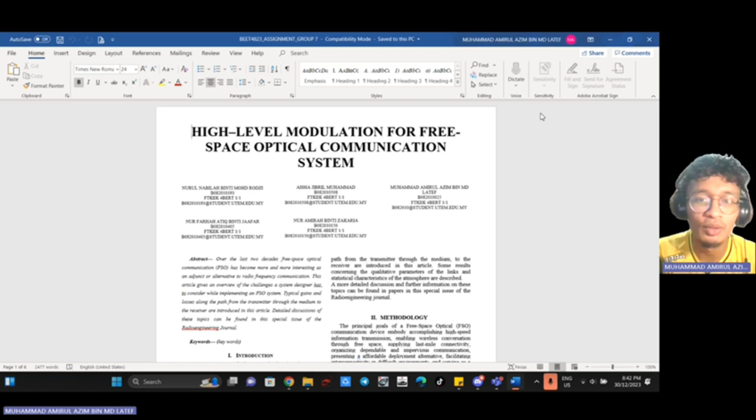Abstract. Over the last 2 decades, free space optical communication, FSO, has become more and more interesting as an adjunct or alternative to radio frequency communication. This article gives an overview of the challenges a system designer has to consider while implementing an FSO system. Detailed discussion of this topic can be found in the special issue of the Radioengineering Journal.

For the introduction, free space optical communication FSO systems in space and inside the atmosphere have developed in response to a growing need for high speed and tap-proof communication systems. Links involving satellites, deep space probes, ground stations, unmanned aerial vehicles UAV, high altitude platforms HAP, aircraft and other nomadic communication partners are of practical interest. Moreover, all links can be used in both military and civilian contexts.

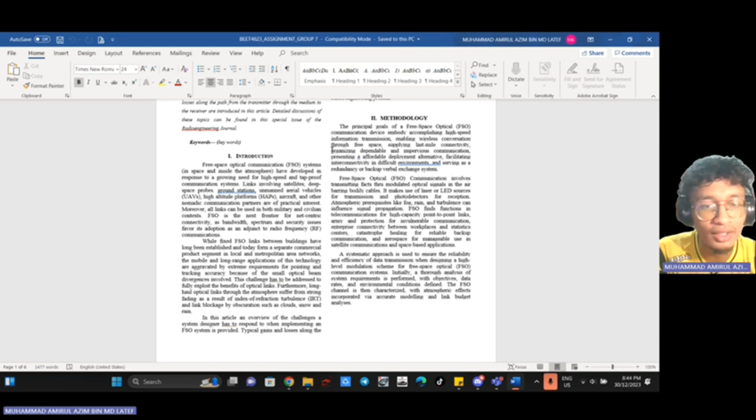While fixed FSO links between buildings have long been established and today form a separate commercial product segment in local metropolitan area networks, the mobile and long-range applications of this technology are aggravated by extreme requirements for pointing and tracking accuracy because of the small optical beam divergence involved.

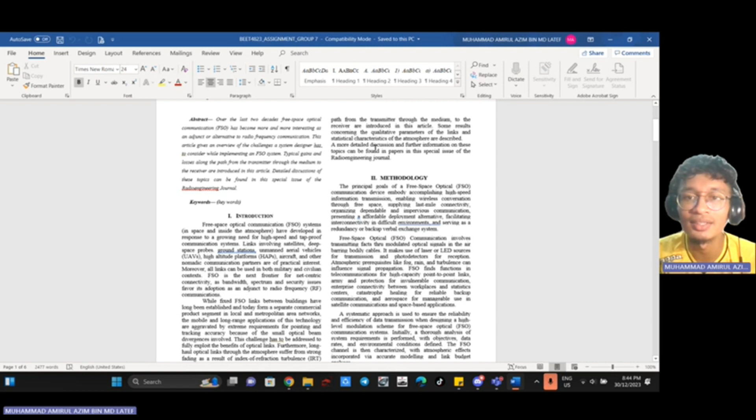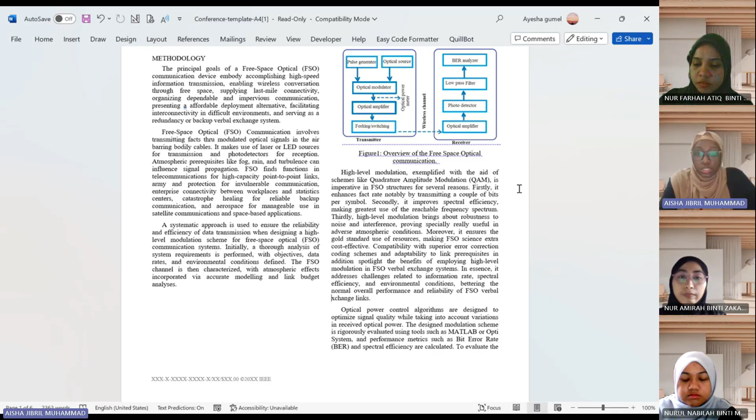For the result and discussion, it is the comparison between different FSO designs, which are MIMO, WDM, and WDM MIMO FSO, and the different distance ranges. The first system design is MIMO FSO. This design uses 4x4, meaning it has 4 receivers and 4 transmitters.

Then the bit sequence will change the signal into binary to make it easy to transmit, going to the pulse generator to carry the wave, and the modulator combines the carrier and the modulation signal. Its function is to make sure the output signal generates the same signal output as the previous. Then we use a low pass filter to allow the low frequency signal to pass through, and we use two visualizers, which are the eye diagram and optical power meter.

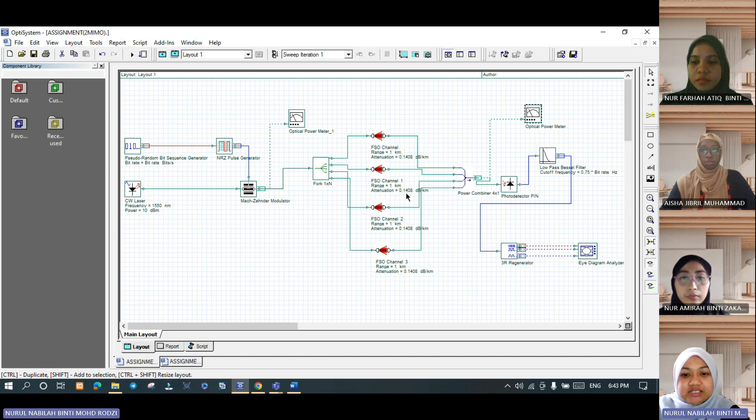This is for the first circuit at 1 km, and the result for Q factor and the optical power meter for 5 km. As we can see, for the first circuit at 1 km, the signal in the graph is sharper compared to 5 km.

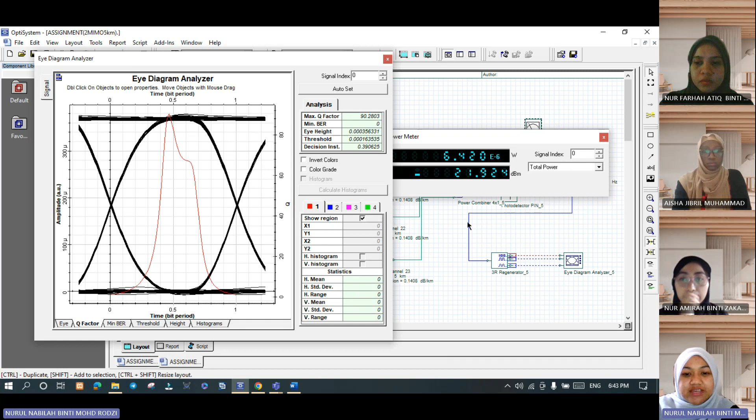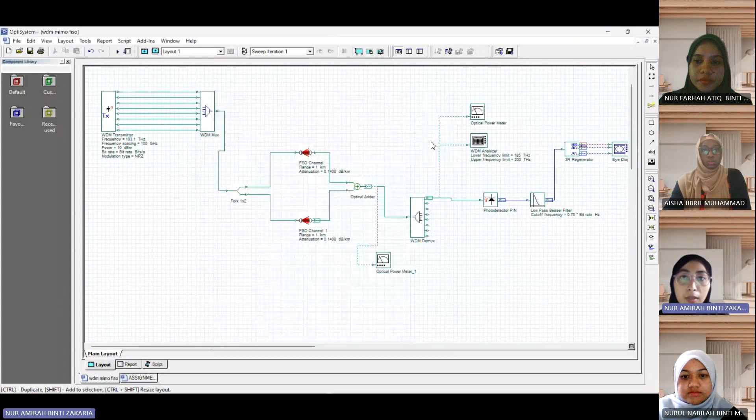This is the WDM MIMO FSO system. For 1 km, you can see the Q factor is high and the system is good. The minimum bit error rate is low, and the received power is 7.305, and the system is quite good. This one is for 5 km. The max Q factor for 5 km is 2.85, and the minimum bit error rate is 0.02.

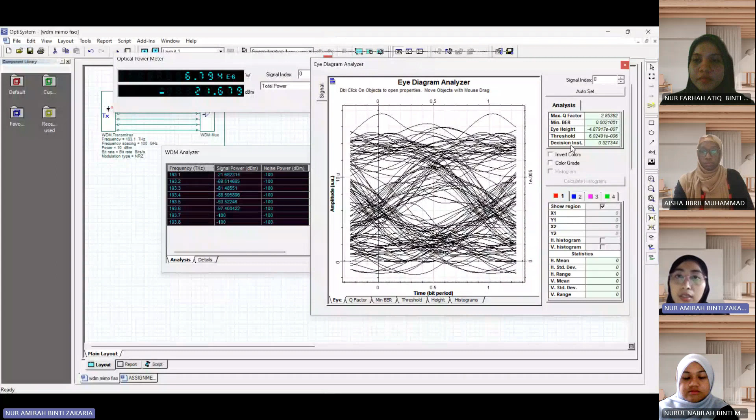From the data, we can see the relationship between wavelength and signal power indicates that when the wavelength decreases, the signal power also decreases. Okay, that's all for me.

This is the circuit for the DMIMO system. The DMIMO system is slightly the same as the MIMO system. This circuit just adds another Mach-Zehnder modulator. It uses the same components, such as a fork which duplicates the number of output ports, so that all of the signal from the component may be linked to the other component, and can run for 1 km.

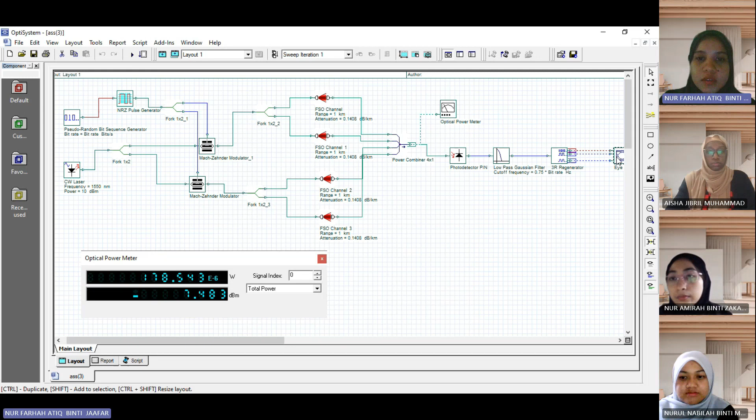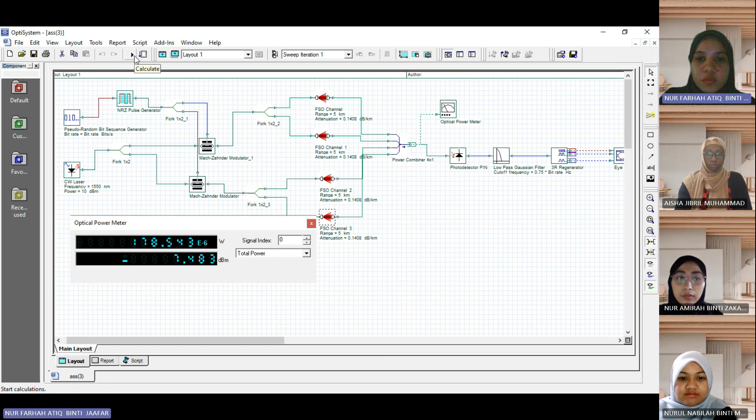This is the result for 1 km for the DMIMO system. We get a maximum Q factor of 43.7951, and the minimum bit error rate is 0. The output power is negative 7.483 dBm.

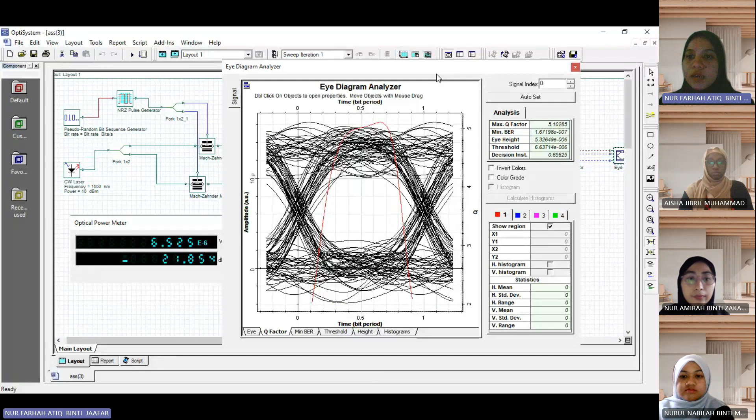For 5 km, this is the result of the 5 km range. We get a maximum Q factor of 5.10285, and the minimum bit error rate is 1.67198E-7. The output power is negative 21.854. For the 5 km range it is lower than 1 km.

Based on the results discussion, we can conclude from the comparison between FSO systems in different ranges that MIMO FSO consistently has the highest Q factor and good signal quality with low error rate at both 1 km and 5 km.

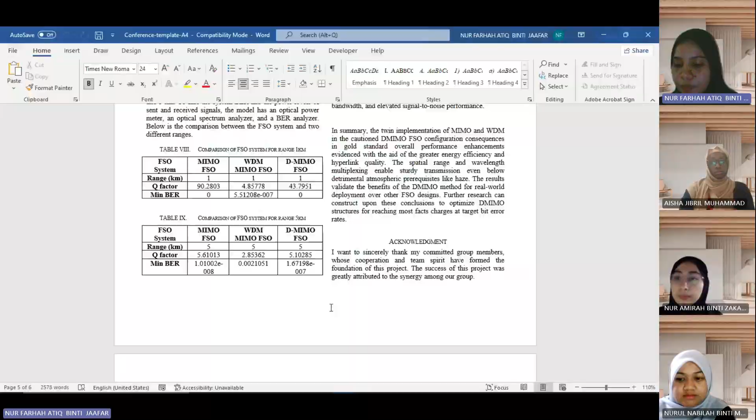Similarities of multiple free space optical communication systems: WDM, MIMO, and DMIMO. The goal was to evaluate their performance improvements in terms of signal energy levels and quality factor, Q factor. In heavy weather conditions, the results show that the proposed WDM MIMO FSO device outperformed the other systems significantly.

Additionally, the WDM approach in MIMO increases system capacity by permitting multiple independent data streams to be transmitted on different wavelengths simultaneously. This provides another layer of multiplexing gain compared to MIMO techniques alone. The combination of WDM and MIMO in the DMIMO system gives better crosstalk, more suitable bandwidth, and improved signal to noise performance. Thank you.